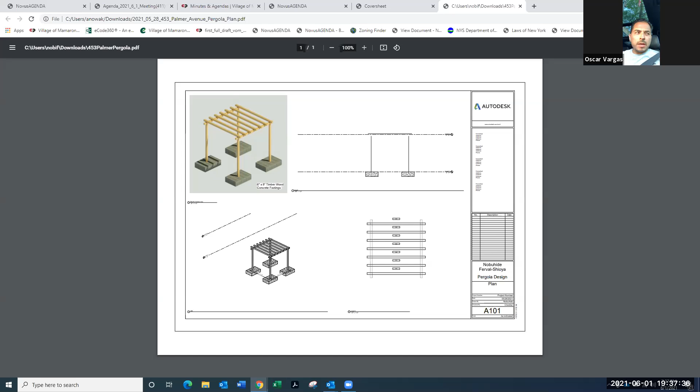Okay, so this is the pergola drawing. It's going to be a 12 by 12. It's going to be right at the entrance of the driveway. And it's a simple pergola. Maybe Oscar, you want to explain a little bit more? Yes, the pergola, as you can see, is very, very simple. All the posts are going to go 54 inches into the ground with concrete, by code. And that's how it's going to be sustaining. Now, if the customer later on wants to add columns around it, just for decorative, we can add stone veneer or anything like that.

All right, well, I have a few questions. First of all, there were two pictures that you included as well of pergolas. Are those just representative, or what are those pictures? It's pretty much the same as it's going to be. Amber, could you show those pictures? Because it doesn't.

Yeah, the pictures are examples of other work that Oscar did, so they are not identical to our pergola. I see. Yeah, okay. They're one example, close and far. Okay, well, the reason I like to point these out is because this is a normal pergola. This is how you build a pergola.

The other drawing you showed is just, you can't build a pergola that way. You can't just nail a piece on top of another piece. That doesn't work. You've got to have joints. Yeah, it was just that we couldn't really do it in the drawings, but that's how it's going to look. No, it's not. We wanted to know how you're going to build the pergola, and you can't build it that way. That's like a toy thing.

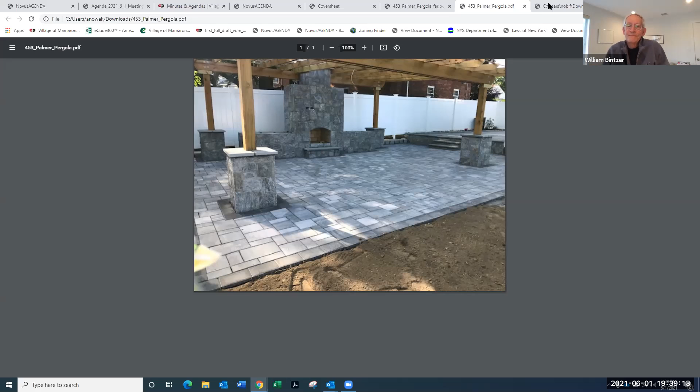I mean, you have to build it like this, with two pieces on either side or something like that to frame it across. How are you really building this pergola? Exactly how you see in the picture. I mean, it's just four posts, 12 by 12. Go back to that picture. And it's going to have two posts. Just go back to the drawing, Amber.

Because if you're telling me you're building it like that, I'm not going to approve it, because there's no way. Oh, no, that's not how it's going to be built. It's going to be built like in the pictures. It's just hard to present it to you guys. All right, so you said it was going to be built like the drawing. Now you're saying it's going to be built like the picture. What are we building here?

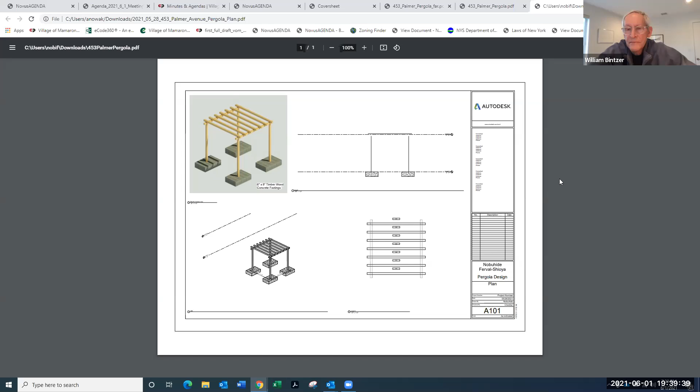It's going to be just like the pictures. It's going to have four posts, right? And it's going to go into the ground 54 inches, by code. And then, just like you see in the picture, we're going to cover the legs with stone veneer. But that doesn't show here either. So this doesn't mean anything. This is just a little diagram of something, a Tinker Toy thing.

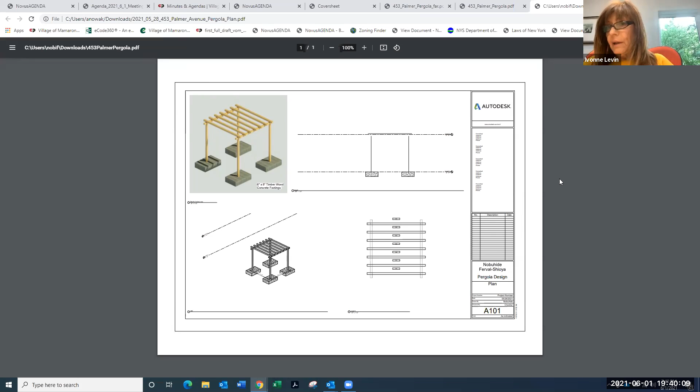Yeah, it's more like a diagram, I think, than an actual construction drawing. Yeah, it was more to show the scale, because the other drawing doesn't show the scale of the pergola. It's a much bigger pergola, the one that Oscar had. And that's why we did the additional drawing in the short amount of time we had. Mhm.

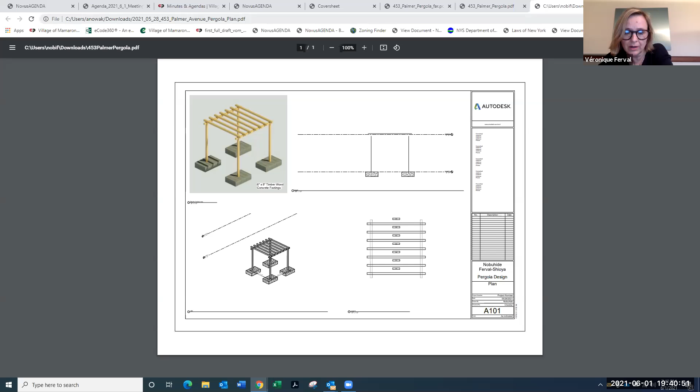Well, the other thing is, I think it would be interesting to see it, because you said it would be right at the foot of the driveway, right as you're entering the driveway, correct? No, it's sort of in the middle, I believe. Yeah, it's a little bit further down. So maybe Amber, would you mind just sharing the other drawing of the whole area? It's the one on, yes. So it's down, exactly. Thank you so much. So if you go up, it's here, exactly. If you make it bigger, you can see the small square.

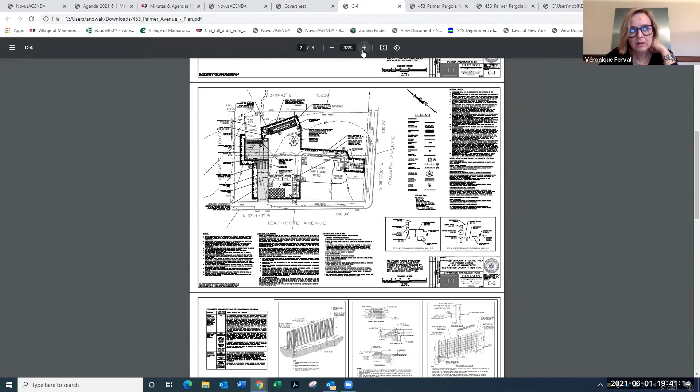So you can see when you enter the driveway, the pergola is between the larger space, that will be the sitting area, and the driveway, right here. All right. And there will be a tree on the corner just to bring a little bit more privacy, and that's it. I do think it would be helpful to see that actually rendered as part of the driveway and the area. Yeah, I would say I would want to see what you're going to build, not just an idea of what it looks like in a picture and an idea of the scale in the drawing. Nothing shows what you're really planning to build here.

No, I mean, it's a 12 by 12 pergola between a sitting area. Does it have stone at the bottom or does it not have stone at the bottom? Which way do the cross members go? I don't know which way they go. I guess they go across the driveway. How high are they above the driveway? 12 feet. Are they square at the end, or do they have ogees on the end? I don't know what it looks like.

I mean, with all due respect, I feel that you showed so many projects last meeting that were much bigger projects with much less level of detail, and it's such a big deal for a small pergola. I don't know that I would agree with that. Mostly they had architectural drawings of what they were building.

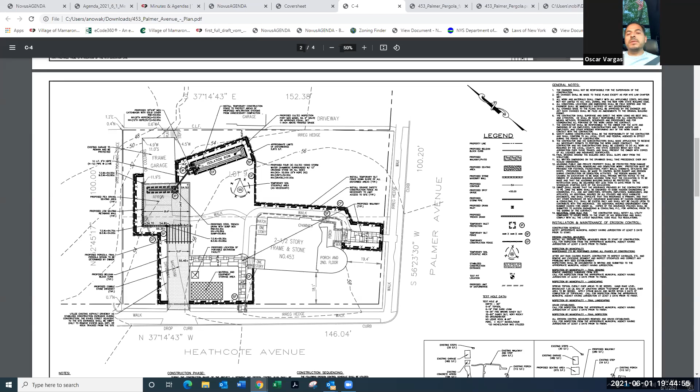The only thing, I'm sorry, with all the respect, if we can somehow help the homeowner, because we've been going on with this for almost 2 years. It's been very, very difficult for her. And I had to go back and forth with the building department. It was just... I imagine the building department would like to see a drawing of what you're going to build. Yeah, that's okay. They will need it.

I'll defer to the building department and Bill, but I'm not sure that you need a CAD drawing of it. But something sketchy, it could be a hand drawing, hand rendered, but with dimensions and showing which way the support beams go, and how it's going to be bolted together. Is there stone at the base, and if so, how high does it go and how big is it?

And so in a nutshell, you need us to hire an architect. No, I didn't say that. Nobody has said that. You keep saying that. I'm just saying a drawing. My contractor can't do a drawing and my engineer cannot do a drawing. So I need to hire an architect to do a 12 by 12 feet pergola on a project that's been lasting for 2 years.

It's unbelievable, how much money we're spending. Your engineer and your contractor can't do a drawing? Okay, so hire an architect. That's up to you, though. All right, so shall we vote? Sure. Motion? Anybody? A motion to have a vote. Yes, I'll make a motion to have a vote. Second. Okay, and I guess, roll call.

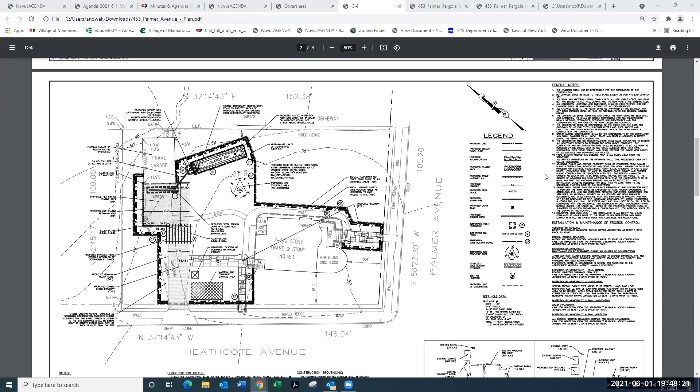Since it's under a certain amount, you can do this drawing yourself. We can give you some guidance. Minimal guidance, but guidance nonetheless. So Dennis Drogan is my name, find me on the website, and all my information is there. I'm sorry, can you repeat your name, please? Dennis Drogan. So I think you were copied on all the emails back and forth with Amber, but maybe I'm mistaken.

It could very well be. Okay. I also see that somebody has chatted who's come in who says he's part of the homeowner. I did say that if you want to participate in this, please come on as a panelist at the beginning and don't try to come on at the end. So I'm sorry you didn't respect that, but anyhow, we are where we are. So anyway, you understand what you need to do.

We need something that shows us what you're going to build there. That's all. I understand you have a lot of time to waste, but I will give you what you need. Pardon me? I didn't hear you. No, I understand you guys have a lot of time to waste, but I'll give you what you need. Well, that's very nice of you. Thank you. Appreciate it. Okay.

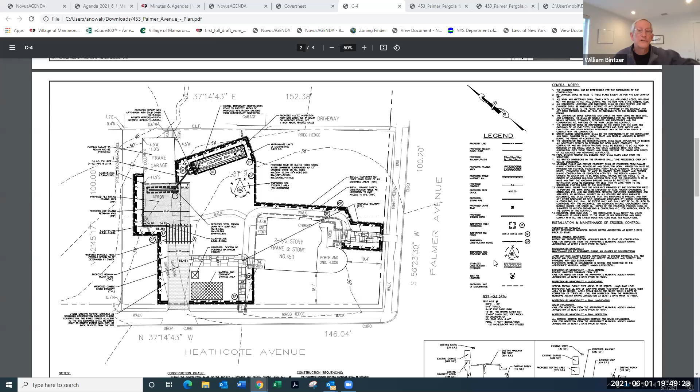All right. Sorry, we didn't ask for public comments here. Oh, I'm sorry. Would that have changed? Well, the applicant has a comment. Well, I did ask for any applicants to come on at the beginning. So if there's somebody who's raising their hand who wants to participate, that's fine. So it's the applicant for the next address. Oh, okay. I understand. Okay, so then we can listen to him if he wishes.

You want to speak, Michael? Yeah, I just want to say, I look at the CAD design that's there and I look at the plan. And as a licensed engineer with 20 years in design and construction, for me, everything that's structural is there. No, okay, Michael. Then describe to me how you build it. So you put this post in the ground. I will do that. No problem. So you pour the two foundations, you put the vertical elements up.

The next layer up is the cross members that go across. Which way? They go across the driveway. And do they have ogee ends or flat ends? Flat, cut straight. There's no ogees. The pictures they showed had ogees. Is there stone veneer on the base? No, there's no stone veneer. The contractor seemed to think there was. I would say if I were the applicant, can I build it exactly as shown in that drawing?

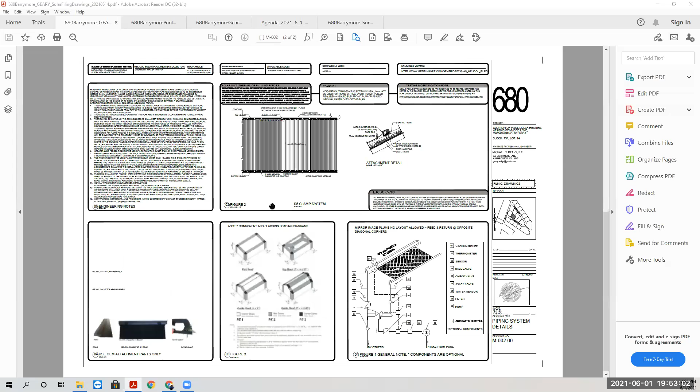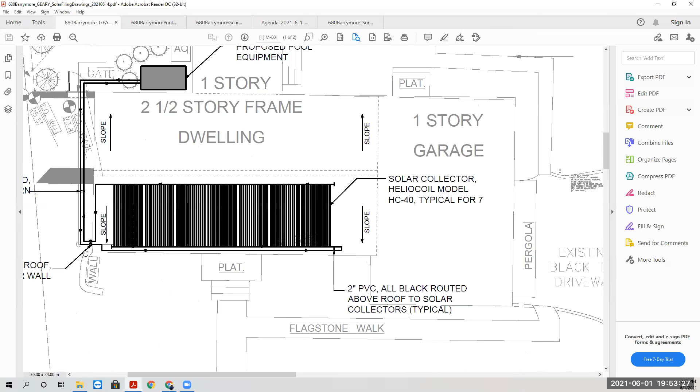Okay, so this is the plan. This is the application. This is a two-and-a-half-story house, and we're putting solar panels on the front. It's part of a pool project that's already been approved and is under construction. The piping will go underground. It'll go up the front left corner, hidden behind the existing leaders. That'll all be in white, matching the trim of the house. And then it'll go to these black panels on the roof.

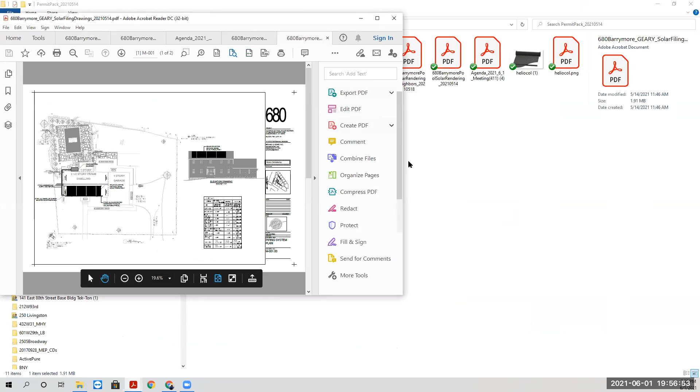Yeah, no, I was talking about both sides of the panels. Can you just expand that? Yeah, there you go. I mean, it's almost there. I was just wondering. Yeah, this will be centered. That drawing a little to the right, maybe. It looks like it's not quite centered. Yeah, the middle panel is not centered on the door. Yeah, that'll be centered.

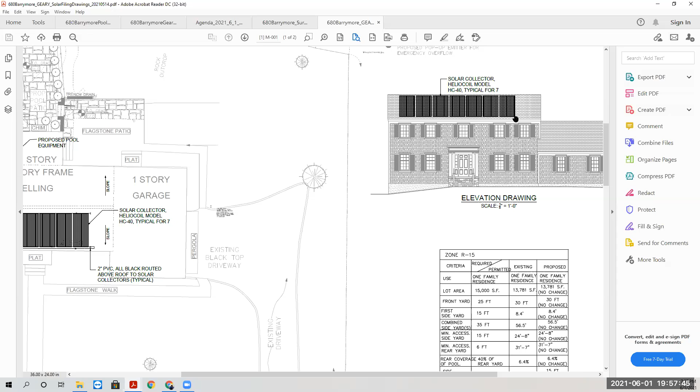Okay, because everything is so symmetrical that I think it will look better. The house is very symmetrical, and if there's not a reason to, it'd be better. No, that's just inadvertent. That's a CAD issue. Oh, okay. The rendering takes precedence; that's what they'll go off of. In fact, that's why we selected these panels; there were other alternatives in shapes and sizes, and we tried to keep it very simple. Like you said, not a huge deal, but it will look better for the homeowner for it to be centered too.

The house is very simple. I am the homeowner. It'll be centered. So I would encourage you to make it symmetrical. Can we just say as we make a motion to approve that we're approving it centered? Sure, I got no problem with that. Centered on the main roof. Of course. Okay. Anything else from the board? No. Anything from the audience?

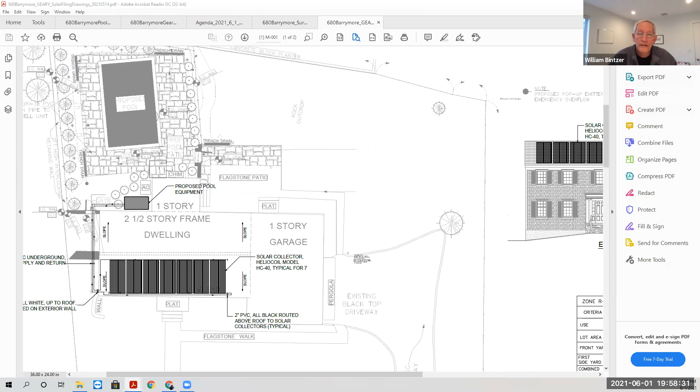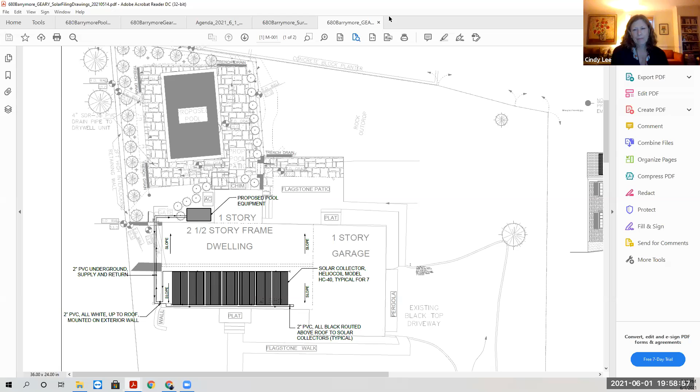I do not see anyone who wishes to speak. Okay. Then I motion. I second. Anybody opposed? No. Okay, very good. Thank you. Bye-bye.

I see that they're here, perhaps. I see the chat. So Andrew, sorry, are you a part of the application? I am the architect, yes. Hi, I got volume, but I have no picture. Can you hear me? We can hear you. I saw a message that the Rabinowitzes are here, but I don't. Okay, I think I got picture. Here we go. Okay, now I see it. We have you now, Randy. All right. There's a picture of Randy Rabinowitz.

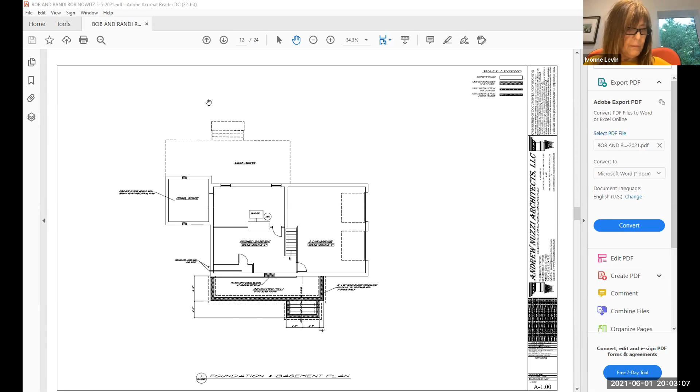This is the foundation plan. So we're going to come out 7 feet with the porch in front of the house. And we're going to be adding all new windows here. There's some brick we're going to take out. We're going to put new siding. On the second floor, we're going to take out the Romeo and Juliet balcony. We're going to put a large egress piece for the windows in.

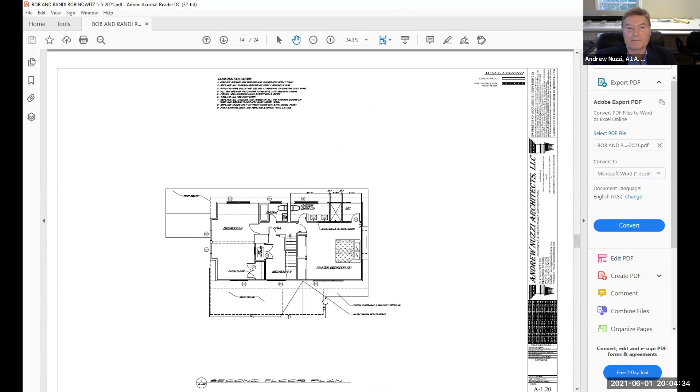That's just a structural section. And this is what the new look is gonna be. Let me zoom in a bit. All new Andersen 400 series windows. They're gonna be trimmed out with white PVC trim with 2-inch PVC sills. All new roofing and siding, new stone veneer on the foundation wall, new forward gable over the entrance, new doors, new Hardie plank siding.

We're gonna box out the rakes. We're gonna add a crown molding to it. We're gonna box out the rake along the main portion of the house. New windows, new PVC trim, rail system by Intex. We're gonna reflash the chimney, new siding, new doors. There's an existing wood deck in the back, which we're gonna repaint. Once again, we're gonna box out the rakes, both for the existing dormers and the main box. New trim.

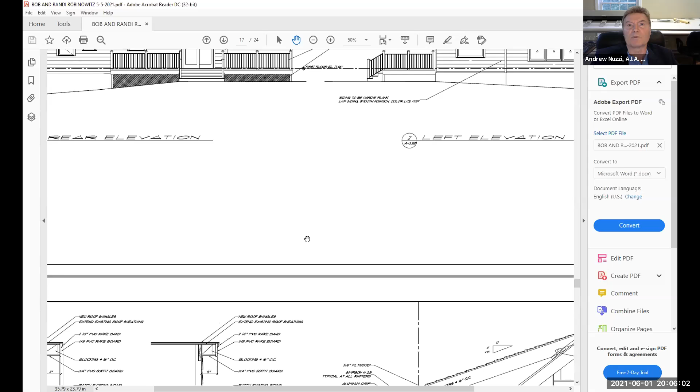And this is where we're going to extend that porch, and we're going to add the stone veneer alongside the front and the two sides. And I think you probably saw the stone sample that Randi and Bob are planning to use. We can put it back up if you like. Yeah, when you're finished, perhaps at the end, we'll just take a quick look. Yeah, and these are just the details of all the rake boards, the moldings that we're going to be doing.

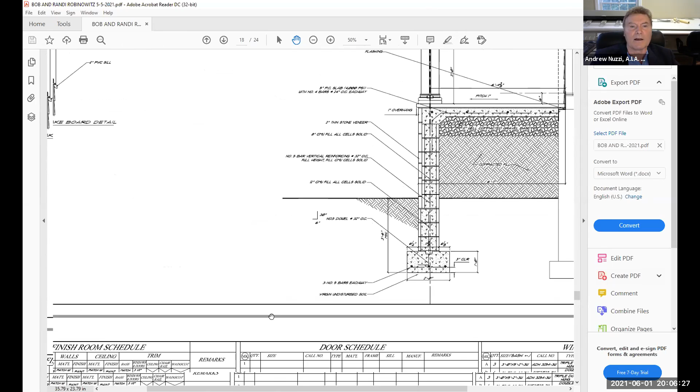You know, we're in the floodplain, so we're going to anchor and make sure it withstands the flood, the uplift and all that stuff with the steel. Window and door schedule specifying the Andersen windows. And that's really it. There's no addition or anything. It's basically just the porch along the front. Like I said, we're going to be stripping the house down to the plywood, all new siding, new roofing, new windows, new doors.

Okay. Questions? I have to say this is a desperate repair because we desperately need this after living here 30 years. Deferred maintenance. Well, the drawings look nice. Thank you. Good for you. Would you like to see the finished materials? Yes, I was wondering, is there a color elevation or just the materials to look at? Just materials.

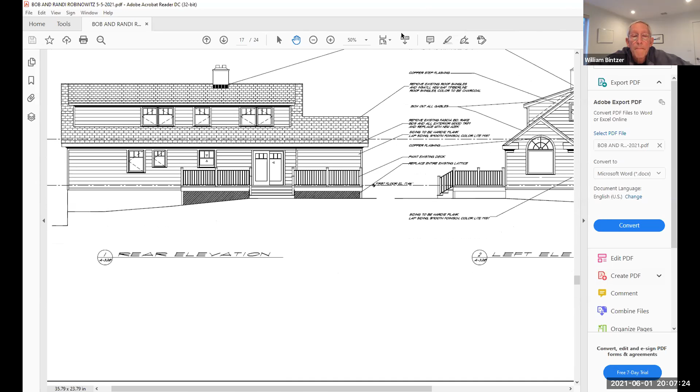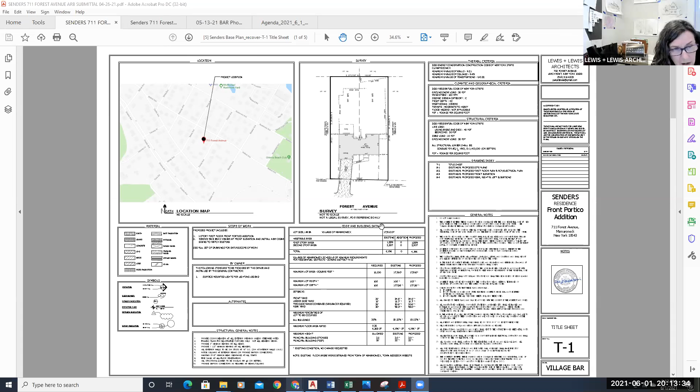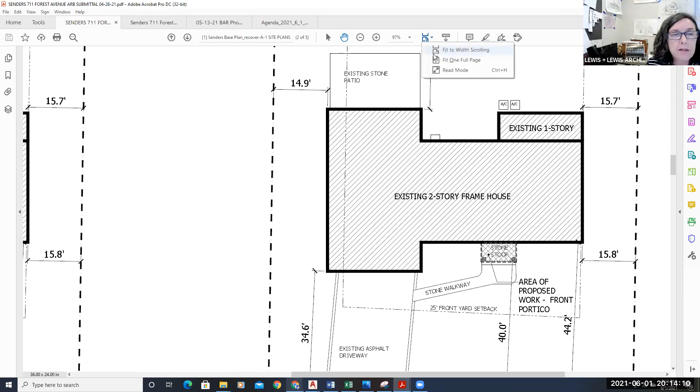So in terms of the site plan, the existing site is on the left, proposed is on the right. So really all we're doing is at the existing stone stoop. I'll zoom in. There's an existing wide platform and stoop at the front of the house, and we're just going to cover that with a new portico. So here's our new proposed. So the width is staying the same. It's a bluestone stoop. And let me jump to the floor plans and elevations. So fairly simple: two load-bearing columns. They have a deep stoop there now, so we're just going to cover that.

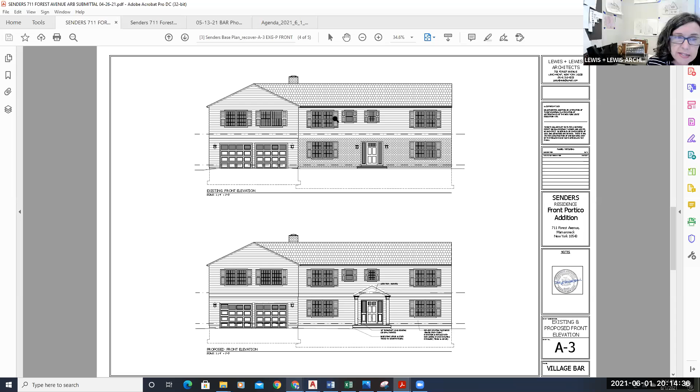And I'll jump to the elevation. So in terms of elevations, here's the existing front elevation. I'll zoom in. So standard colonial, we have a brick veneer front facade, dining room, eating area windows. And what we're proposing to do, here's the proposed, is remove the brick and add cedar siding to match the rest of the house. Here's our columns; the front door and side lights are existing. They replaced those a couple of years ago, so we're not changing that. We're just adding a gable roof, a cutout, and the columns with the asphalt shingle roof at the front. So that's the front elevation.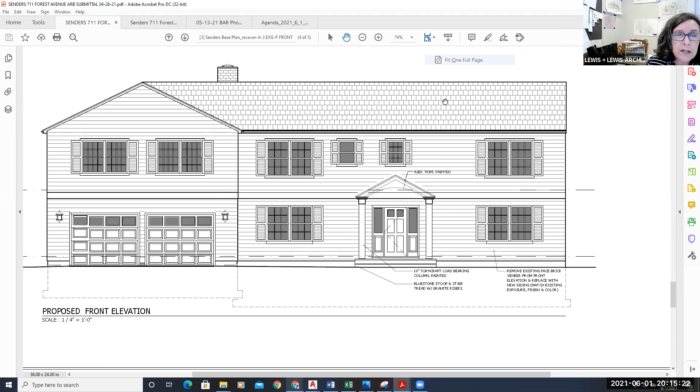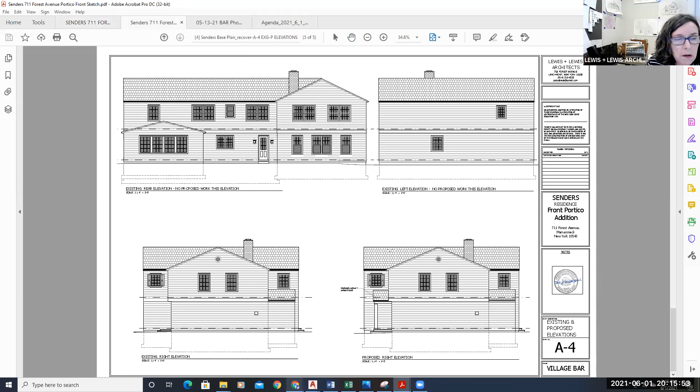I'll walk you through the side. At the rear, there's no change. So really it's the side you see, zoom in here. This is the right side, so you'd see the asphalt shingle roof and the side view of the column. And to help with that, I did a little sketch a while ago, showing Ben and his wife Jennifer what it could look like. So here's just a quick 3D sketch to give you an idea of what we're talking about. But the roof is not a metal roof, it'll be an asphalt shingle roof. And then to give you an idea of what it looks like now, this is the existing photograph.

And there's a side shot of it. And then the neighboring property. You're replacing the brick veneer with siding. Will that be still inset like that, or will? Yeah, so the second floor hangs out, you know, like 18 inches. You're just recovering. Okay. Yes.

And then, any questions? So it'll be all white, right? Correct. Kind of, yeah, like the rear facade. Yeah. Okay, good. And it's cedar painted. Cedar painted, just to match. I'll zoom back in. You know, we'll be matching. Okay. Trying to clean it up and keep it simple for you guys. Yeah. It's clear, pretty clear.

Thank you. All right. Any questions or comments from the board? Anybody in the audience wish to speak? Amber. I do not see anyone who wishes to speak. All right. May I have a motion to vote? A motion. Yeah, and I'll second that. Okay. Anybody opposed or abstaining? Nope. Okay. Very good then. Then you're good to go.

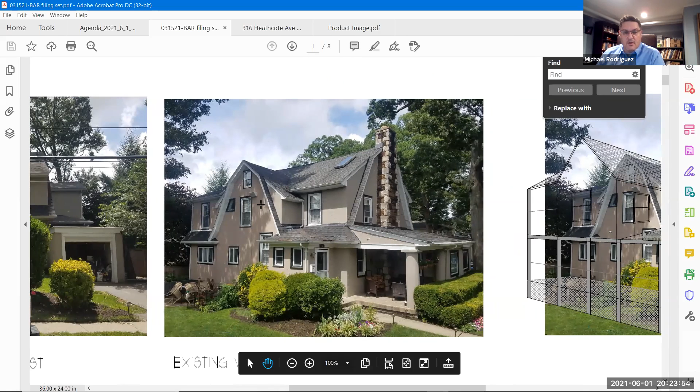Here is the facade that will have most of the exterior work done on it. As you can see, there's already a wing, if you will, coming off, set lower than the main roof. What's proposed, and this is just to give some sort of three-dimensionality to it, is we'd come off from that existing wing an additional 10 feet.

What that does, it gives us a master suite upstairs, no change to quantity of bathrooms or quantity of bedrooms. It would just make this back bedroom our master suite. It'll give us now a nice wraparound L-shaped porch, I should say. And then we'll cover that, extend the front. It would also afford us to have a covered entry instead of a non-covered entry.

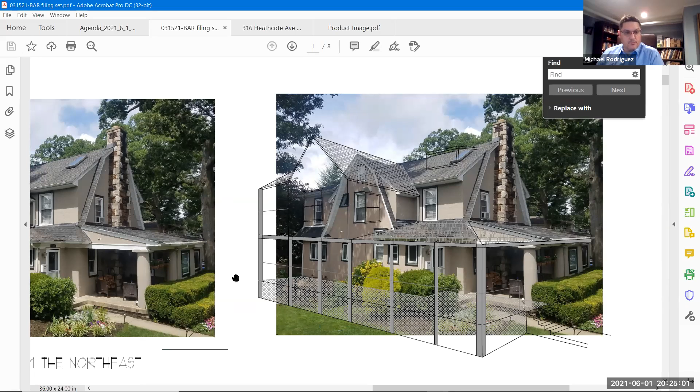As you can see, the existing porch, at some point prior to us buying it, half of it was enclosed for a front room of, I think maybe they had an additional bedroom there. At some point we used it for a TV room, not important. But as I zoom out here, you can see the site plan.

And again, the primary areas of work would be this west side, and then this new entrance off the driveway, the existing driveway, into the basement. I actually have a window here. The opening is more than 36 inches, so I'd be able to put in a 36-inch door getting to the basement. It would also give us a direct line in to bring furniture in, which would help not have to take our furniture apart to actually get it into the basement.

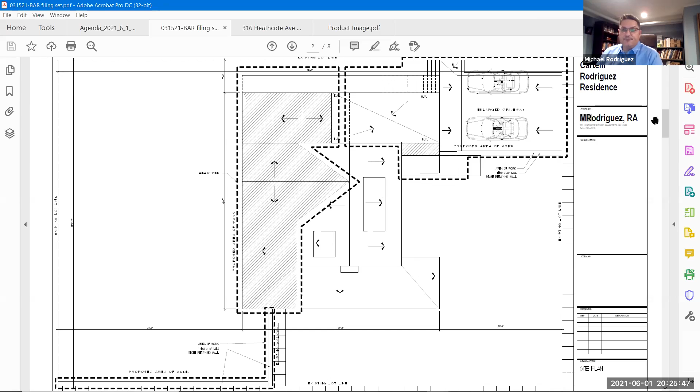I'll scroll down here too. So we'll be doing some new floors, but the kitchen ostensibly stays the same. This is the porch I was referencing previously. So on the first floor, it's primarily just this porch that goes around. And then here, I'll zoom in. The master suite here in the back, little porch, bedroom, and then the bathroom. The existing bathroom is in this area right now currently, and we would just shift the plumbing over and create a walk-in closet.

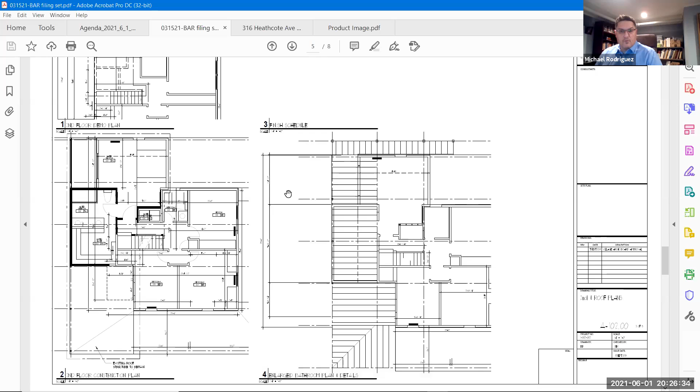Elevation wise, this is what the elevation is proposed to look like here on that east side. We would obviously have stairs coming out and going into the backyard. This was just to show the board what we were proposing. So asphalt shingles for the roofing, and then the Hardie plank simulated shingle we would use on the wing coming out, and then the Hardie plank on the preponderance of the facade. Keeping with the same aesthetic, we would use the Doric column to go around, and then we'll use some vertical siding here to cover up the underside of the deck.

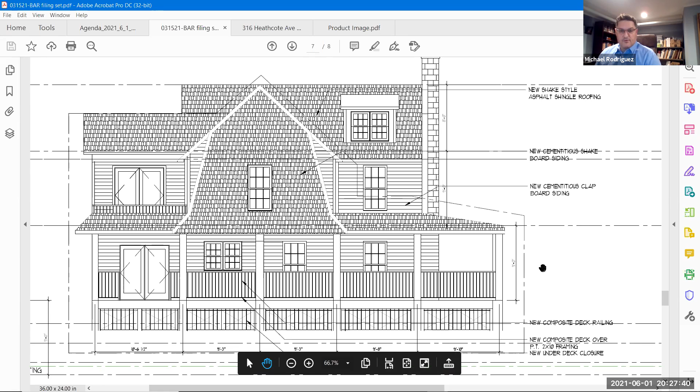Okay. This would be the south side. This is right on the lot line to the neighbor next door, so that's not viewable from the street facade. Our two preponderant street facades would be this upper one here, which is the west, and this one here, which would be the north side, and our entry off of Heathcote.

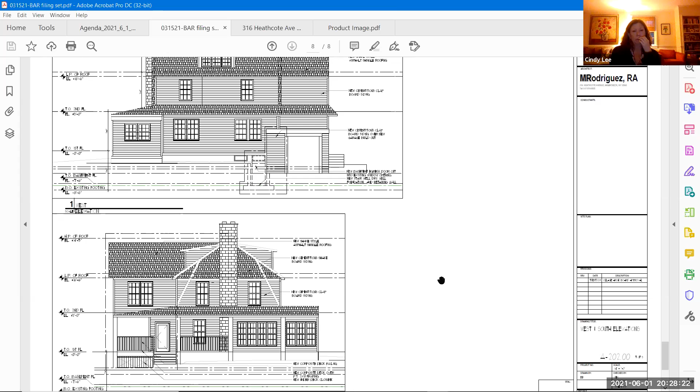So we'll go to pictures right now. This is what I had submitted. As you can see, we would propose to change just an amalgamation of different size windows, types of windows. We're just trying to collect it all together and kind of beautify. Definitely. One question there, since you have the picture. That facade is going to grow like 10 feet out, right? Are you kind of extruding the whole thing, the gable with the barn type? That's correct, but it's just this upper part here. The first floor would be a continuation.

As you can see in the front, we have a small covered porch, right? So that would just now be an L and would come across that north facade and then down the east facade. So that lower section does not get expanded whatsoever. Yeah, okay, the top. Just the top, yes, ma'am. Okay, but I didn't know if you had taken all of those elements out to the final facade. The small gables on the east side are being extended as well? Are being maintained, yes. Okay, because it wasn't very clear by looking at, okay, that's the roof. All right, thank you.

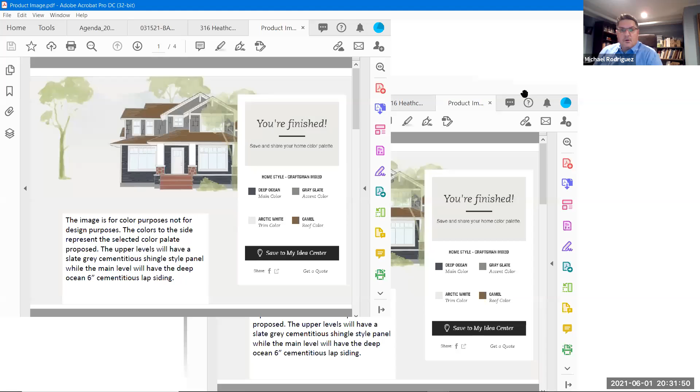All right, so we've seen these already. This is across the street as you look from our property north. And that's the other photo. And sorry, I'm just trying to get to this document here. Just for coloration and to help, because I was having a hard time getting samples of the Hardie plank for color, these are some of the colors that we are proposing to utilize.

The roof line would probably not be this color, but we're looking at doing a two-tone, so a lower and an upper. The gray being the simulated shake panels from James Hardie, and then the darker color on the base of the house on the first floor. And then the trim would be a PVC trim around the house as well. Currently, all the trim was redone, and it's all bent-up aluminum. It's pretty horrible, and so we obviously want to replace that with something that's more sturdy.

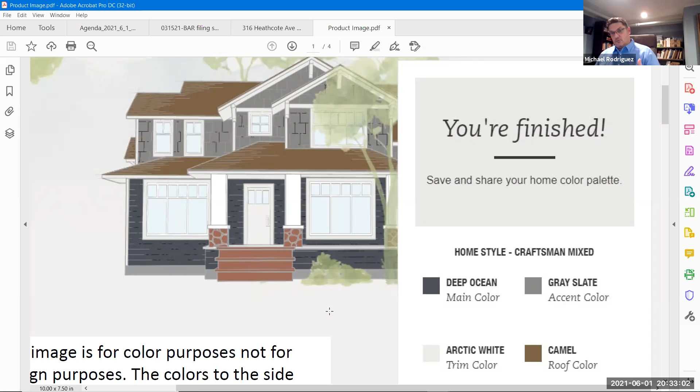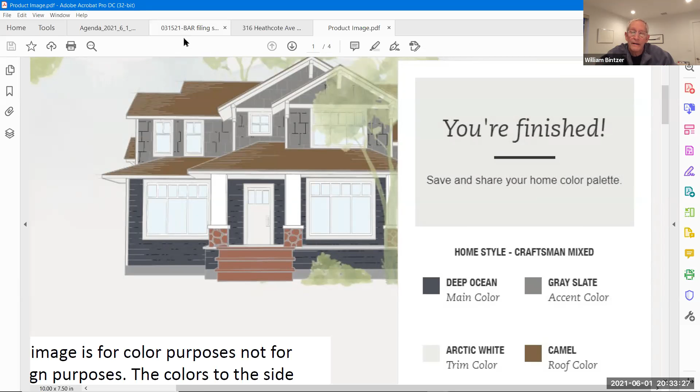And in addition, when the stucco was painted, at some point they removed whatever trim was there around the windows, and the trim is actually just painted on right now. So again, we'd like to put in real trim upon the replacement of the siding and the windows. That's interesting. If you're done with this, could you flip back, now that we see what you're planning with the colors, to the Stanley Street elevation? Which is the elevation that most people will see, I suppose. They would see this one and this one.

Yeah, those two. Okay, so the top part's gray, the bottom part's dark gray, the roof's to be determined. Okay. And likewise there. And that's all getting new windows, that playroom or TV room? Yes. We want to widen them up; right now the aesthetic is just all over the place. They're picture windows. Sure. It looks nice, those new windows. And with regard to the roof, if you're not using that color, what color are you thinking of? What type of color?

I would probably extract a brown. That, to me, seems a little bit too reddish. I would probably, as we zoom in here, pick out something a little bit more brown, like this, and match it with tones of the natural. A little darker. Yeah. Okay. So not an overall dark house? Not at all. We like a very light house. But for the roof, I think we'd probably go with something darker.

Okay. It's a great chimney. Yeah, it really is. It makes the house. It's a beautiful chimney. Okay, so keep the chimney. Absolutely. Are there any other questions or comments from the board members?

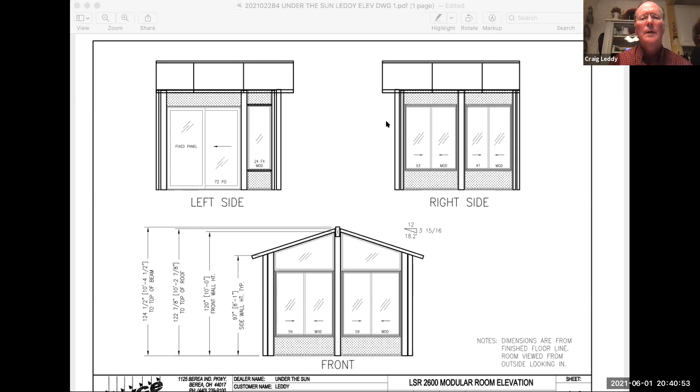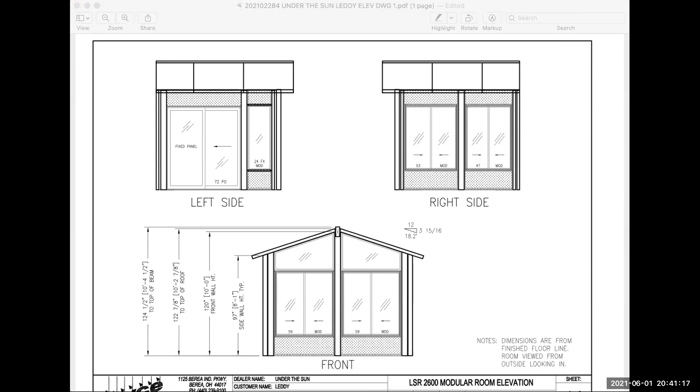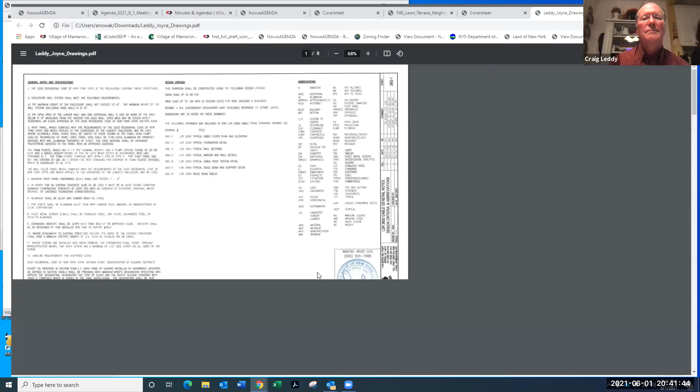And now you should be seeing a little bit more of the plan itself. No, we're not seeing a plan, just the elevations. Mhm. Let me see if I can do that. I'm just gonna share the documents that you've provided on file. Okay, thank you. So if you could give me some guidance as to where. Yeah, actually, if you go back to that first one, I think that was good.

Yes, that's right. Jim, do you want to speak to any of this? Sure. Can you hear me? Yes, we can. Good evening, everyone. I just want to clarify, I'm the owner of Under the Sun Improvements, and what you're looking at are stamped engineering plans from the factory. And then we also have stamped engineering plans for the new platform that are from a local engineer. So this is a prefab sort of a sunroom then? Yes, sir.

It's a vinyl product with a lot of movable glass, like Mr. Leddy was saying. It's designed to let a lot of light in. It's low E glass. It's vinyl on the outside. It's white, so that goes with the decor of his home and Margaret's home. If you go to the other drawings, you'll see where we're putting it with the new base. But this is exactly what it looks like, and it will be white. We'll match the shingles also. It'll have 2 gutters, 2 downspouts.

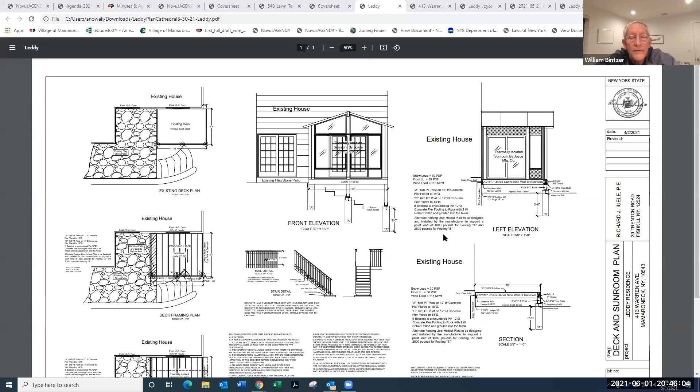Well, it's not perfect, but it's better. Let me see if I can share that. It shows a kind of yellow colored thing. See if you have a little better luck here. I think I've got the cathedral. Oh, am I not sharing anymore? Sorry. Greg is sharing now. Now you're sharing. Okay, there. That's it. There we go. I think that's the one you were talking about. Yes, thank you.

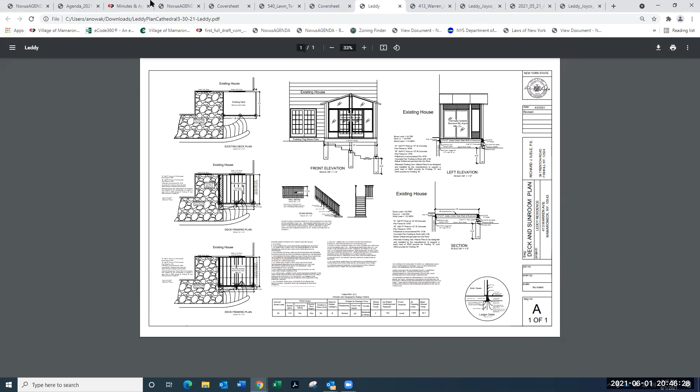So this is what is going on, right? This is the one being built, and that is to scale. Yep, that's exactly what's going on right there. Can you expand that a little bit? It's matching the first plans that Mr. Layton showed. There you go. Thank you very much. So that's going to be a new deck. And other than that, it's the same footprint. It's 12 foot wide. It's a 10-foot projection. Okay. So the other elevation, what does it look like?

It's 10 foot. We see the front, we see the left, and the right is going to be just glass. Yes. So it's almost like a greenhouse, except it's got a solid roof. It's much cooler than a greenhouse. Well, I'm just saying it looks like it's all glass other than the roof. Pretty much. I mean, there's no solid walls, right? There's no opaque walls. No, it's all glass. Got it.

There is a knee wall along the bottom. I see. Only on the side, not the front though. The front is glass. And on the sides, it looks like there's sort of a spandrel across the top too. Yeah, okay. I'll give you that. So the front is all glass. Yes. The cathedral kind of deal you were talking about.

So the other one, the one where you exit, where you have the sliding doors, is the wall metal? No, the whole room is vinyl on the outside. It's aluminum sleeves on the inside. Okay. The vinyl is on the outside for low maintenance. And yes, there is a kick plate on the bottom. That bottom portion, when you're looking at it, is a solid piece at the bottom.

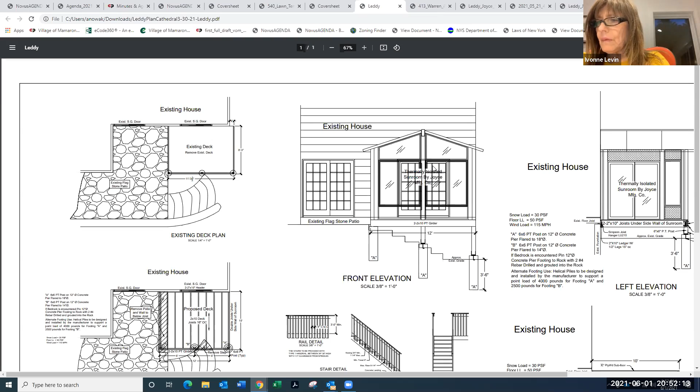Maybe it'd be helpful to look at a survey or a site plan or something, just to kind of orient where we are on the whole house. Agree. Let's see if she has that. Otherwise we can try it. It's small. Can we zoom in a little? Okay, so all this is happening in the back. It's in the back of the house. Correct.

Yeah, and there's a slate patio that's been there for quite a while. And it comes off of what we call our TV room. So that's a nice look flowing from that into the sunroom. Okay. Let's see, are there any other questions from the board?

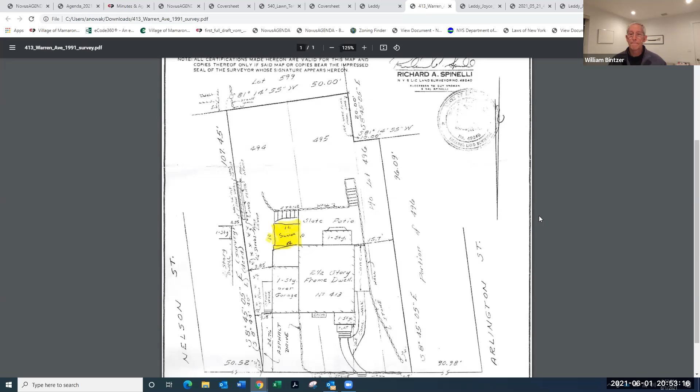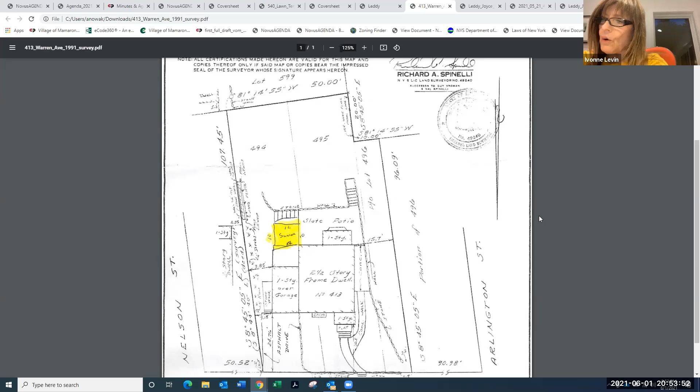Just one question. Those railings shown in the drawings, where are those going? On the existing stairs, or? I saw some railings. I didn't know where they were. Yeah, those aren't part of this. They are not? No, there will be no new railings. There's no need to have a railing there. I think they were thinking that they might be rebuilding that, but we're sticking with the original stone steps.

Could we go back to the first image you showed, the photo that shows the house, the existing conditions? Yeah, the photos of the house that we started with. I think you might be referring to what the applicant showed. I don't know if we have that. Hold on, let me see. I sent those over to Amber a while ago. And there was another one, the deck one, the first one you showed. Well, that'll probably do it. There you go.

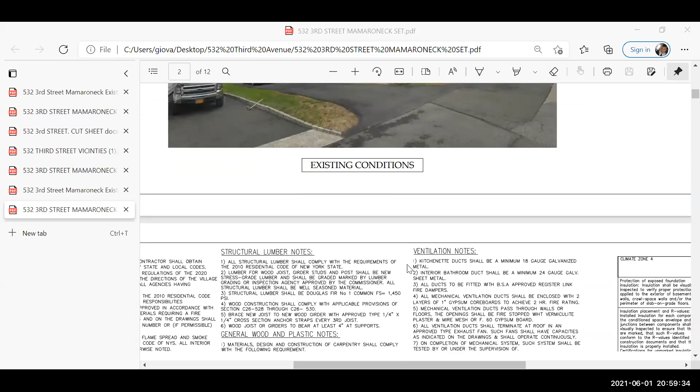The proposal doesn't include any changes on the front, which is the most important part of the street level. And the extension, I'm going to show you on the floor plans. So the first drawing shows the existing conditions of this property. This is the existing, and in the back there is a rear garage, and this is the proposed extension. So basically, the proposal is in the rear yard and in the side yard, in order to accommodate circulation inside the house to connect first floor and basement.

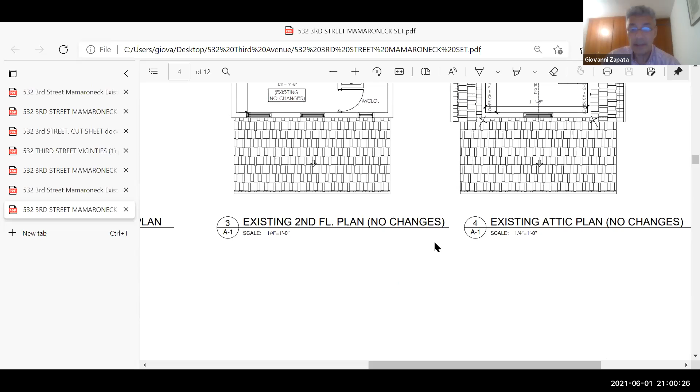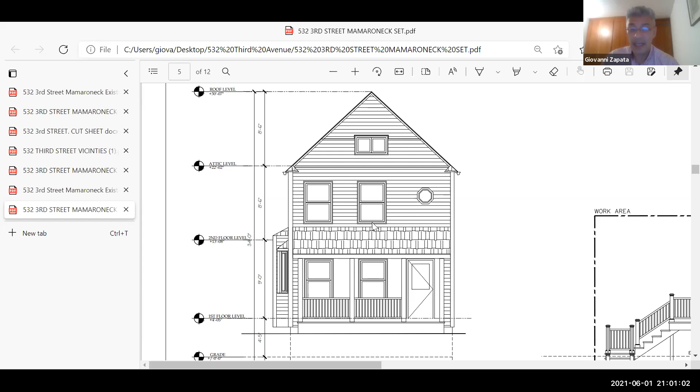This is the existing condition. It's a small house, as you see, and the deck in the back. This is the second floor. Let me show you the first floor. The first floor has in the back a laundry area and the dining area and the kitchen in the middle. And in the basement, we have an existing open space playroom. Second floor remains as is, and this is the main elevation. As you see, it's a new colonial style with very plain finishes like vinyl siding, vinyl windows, and shingle roof.

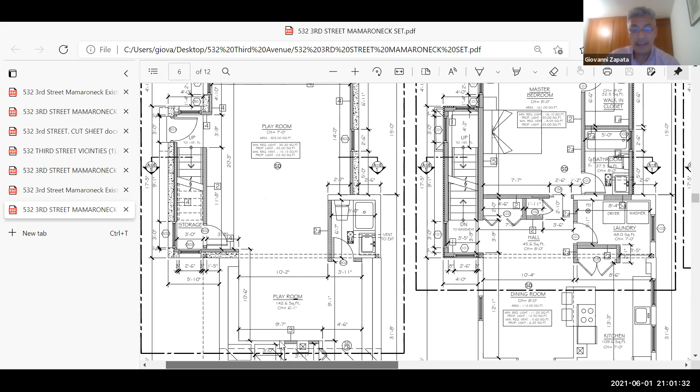And this is the back of the house with the deck and the circulation to go to the back. And this is one of the side elevations showing the existing extension and the existing deck. And this is the proposal. This is the first floor, the existing house. We are going to keep the kitchen in the middle, and the extension consists of a new master bedroom for my clients, with a walk-in closet, full bathroom, and the circulation and the staircase going down to the basement and going out to the patio or garage or the driveway.

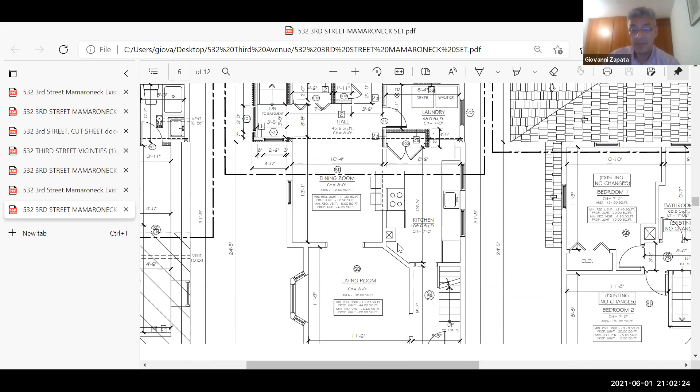The dining area is going to be extended, in order to accommodate a coat closet, linen closet, and reconfigure the laundry area and make an open space from the kitchen to the dining area in order to make the space bigger. Basically, this is the side elevation. As you see, the idea is to have a continuation of the existing style of the house from the basement to the first floor, using the same type of materials, vinyl, Andersen windows, and a gable roof with asphalt shingles to match the existing. There are existing solar panels that are going to remain.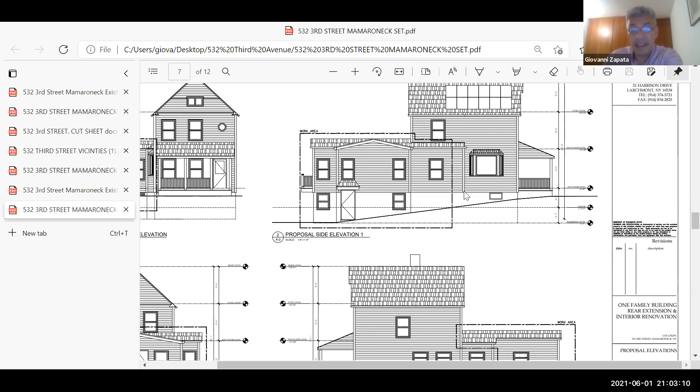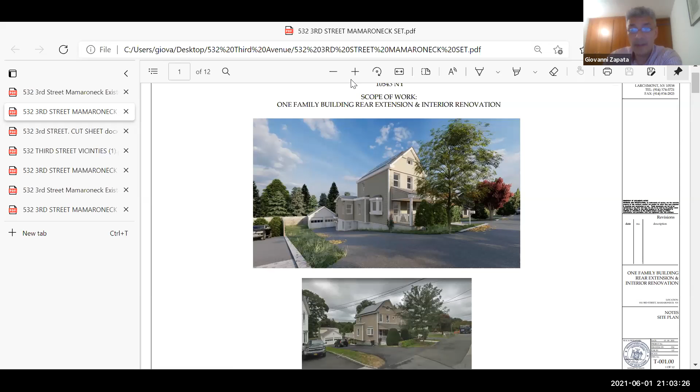Okay, so let me show you. This is one of the new images that we are going to have at the house. As I mentioned before, the objective is to try to keep the same style of the house in the extension, using the same base in a stucco finish, and the extension is going to be done in vinyl siding to match the existing one, and the roof is going to be asphalt shingles, as shown in the rendering. Excuse me, just a quick question. So this is a rendering showing the proposed addition on the back, right? Yes, exactly.

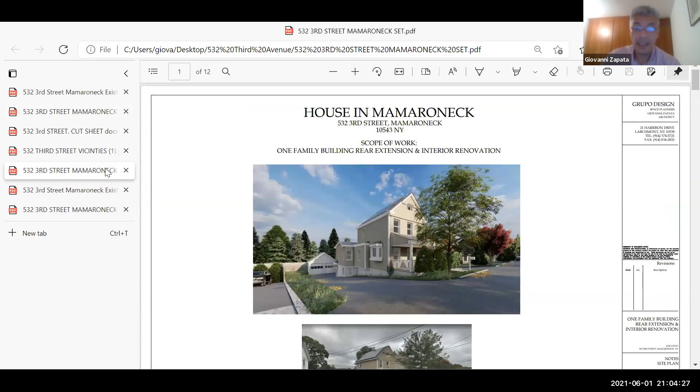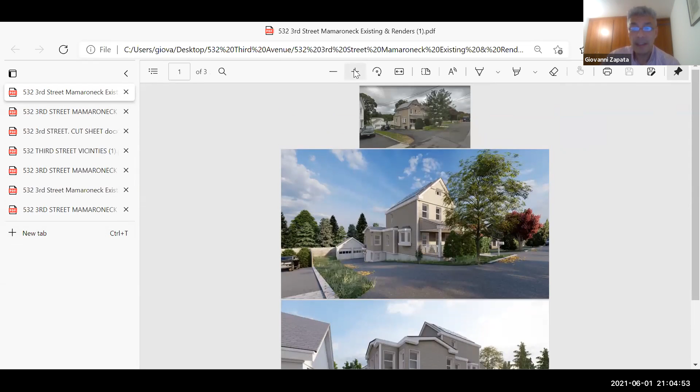So as I mentioned before, the idea is to try to match the existing style and the existing new colonial building, extending the back. This is the existing house. As you see, vinyl, the shingled roof, and the stucco. So we are going to finish this area. Okay, this is the rendering I have. This is the existing house, and this is the rendering that you see in the presentation on the set of drawings, showing the materials, and this is the other view.

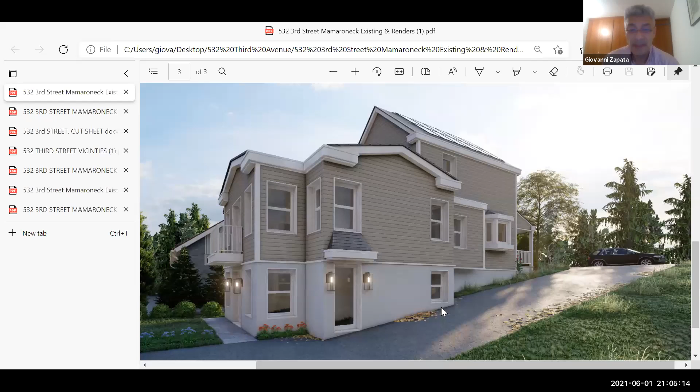This is the other view. So, as I mentioned before, because of the pitch, we are going to try to keep a stucco in the basement. That is going to be like an on-ground basement for the family room downstairs, and this is going to be the master bedroom with a little balcony, and we are adding a little porch to emphasize the entrance to going up to the first floor or to stay on the basement.

As I mentioned before, I'm going to use the same material, vinyl in the siding, shingle roof on the top, and all trim is going to be PVC, and we are going to use gutters and spouts in white color in order to try to simulate the existing house. Let me show you the materials. So the 5 inch vinyl clapboard, asphalt shingles to match existing, Andersen 400 series windows, and PVC trim.

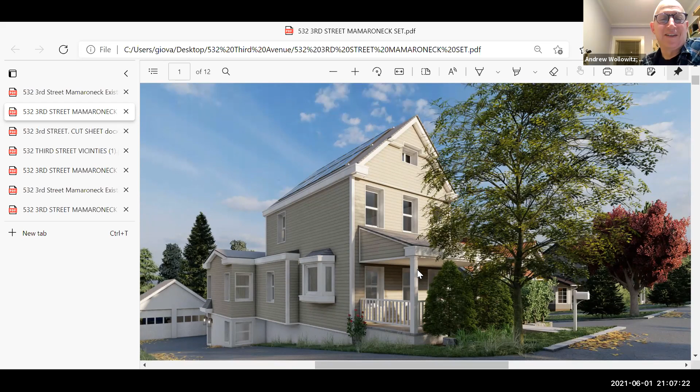I think that's all. I don't know if you have questions. Can you go back to that page with the proposed sketch? Sketch, I know. It almost looks pretty, almost CGI. That is the best rendering we have seen. I thought they had built it already. Yeah, the building is already there. I was confused when I looked at that on the web before the meeting too. I'm glad it wasn't just me.

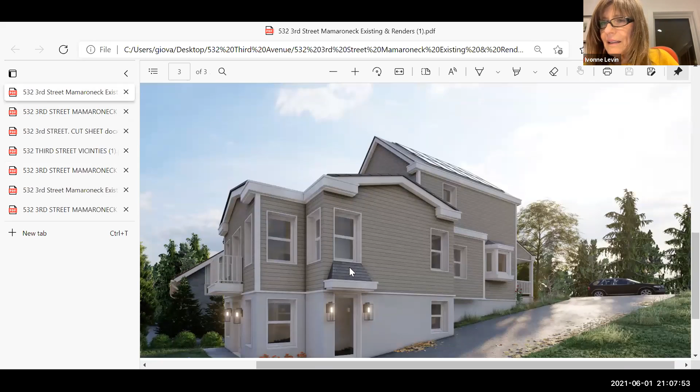If I had one comment, I would say that whoever parks on the right side of the garage will have to be very careful backing out. The car, yes. But we have a lot of room. Can you show the other view of this rendering from the garage? Yeah.

I just have a little question. This is just pure aesthetics, and I'm thinking about the detail on the corners. I understand that you're trying to mimic the detail in the main house. I see that quite deep detail, and I just wonder, it looks a little heavy on the corners. I was wondering if it had to be that wide. So it's just an aesthetic question.

Yeah, I think the rendering shows a very heavy trim on the corner, but I would say that it's just the view of the rendering. The idea is to use as much as 3 inch trim, because we don't want it to look like a column or a very heavy exterior corner. It's just to put the corner together with the two materials. Yes, you're right. It looks very heavy, but it's not really. It's just the rendering. Like you see on these corners, they are less. Yeah, it looks better in the house.

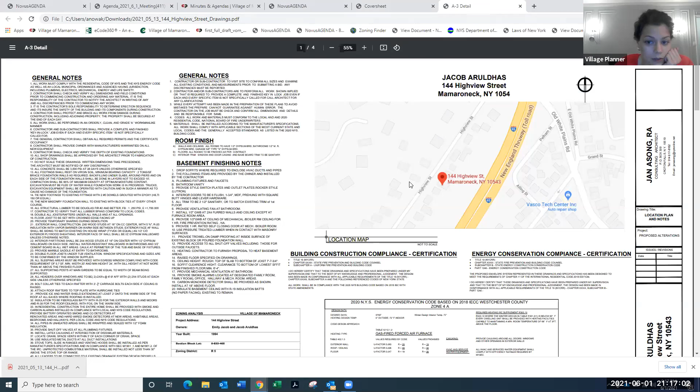Do you have drawings to share? Yes, I do. I don't think I can pull up my drawings. No, I cannot pull up. There seems to be a glitch with how she signed on. Amber, do you think you could bail her out with the drawings? Yes. Amber will share the drawings for you. Oh, good. Okay, thank you. You just won't be able to point with your cursor. You'll have to direct her. Okay, one moment, please. When I click on the attachment, it just comes up as a blank screen. Oh, there we go. This is Amber doing it, though. So tell her what to click on. Could you scroll down to the next page? Can you see us? No, I cannot see any of you anymore. Are you sure you don't have just a document open? You should look at Zoom. When you're in Zoom, do you see us? Yes, I see you. Great. So I'm going to share my screen again. Here's the drawing set that we have open. Can you direct me to what documents? Yes, let's go to page 1.

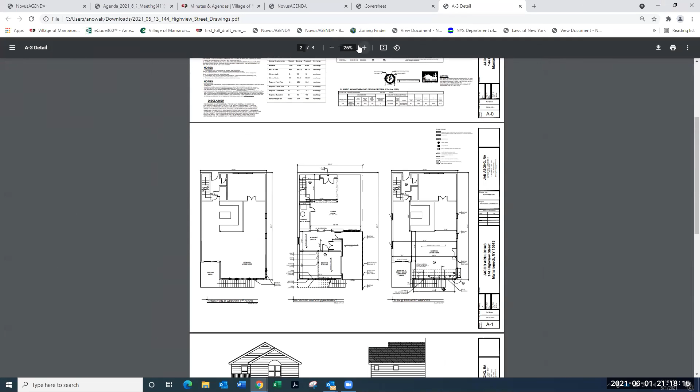Okay, so if you look at the floor plan of page 1, well, let me just summarize what we're doing first. We are replacing a window that he has on the east wall of his open plan living space, which includes his living room, dining room, kitchen, and a small study. And all that is open plan looking out east across the rear of his property and across Interstate 95. And that window is approximately 11 feet long. It is a picture window with double hung flankers on each side of it. It is about 5 feet high and 15 inches off the floor.

And he wants to expand his view, which is quite a distant view, very lovely, across the entire wall, which we have succeeded in doing. If you look at the floor plan, it's at the bottom of the floor plan, actually. And you'll see the 4 posts and the 4 stationary windows across that eastern wall. Those new windows that we're installing there are going to be 4'5" wide and 6 feet high with a 12-inch sill height, expanding his view tremendously.

And we're proposing to replace a window around the corner from that on the north wall, which would match in height the 4 picture windows facing east. So we're proposing to do that. And then what the owner, Jacob, would like to do is take that existing window that we're removing from that wall and install it in his garage workshop, which is above grade, but in the basement level.

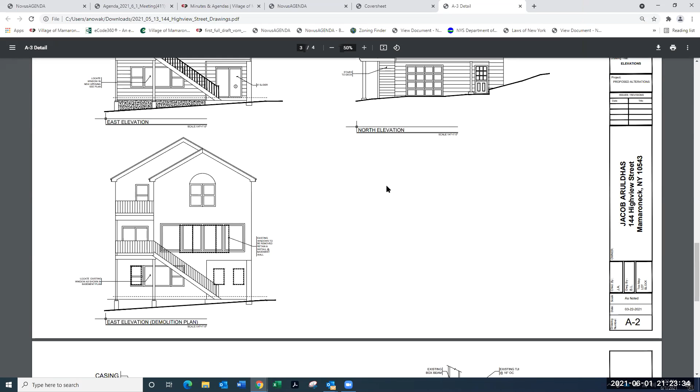Okay. So this is all on the rear of the house. Actually, that north elevation, can you just show that? Can you just slide up? Yes, the north elevation. Because that has the other new window, right? Yes, that has the corner. Amber, can you scroll up a little bit or scroll down? Right there, exactly. There's the double leaf casement window, and that window matches in height the new stationary windows on the east wall. Understood. So that when you walk into the room from the inside, it gives that wraparound look at the corner.

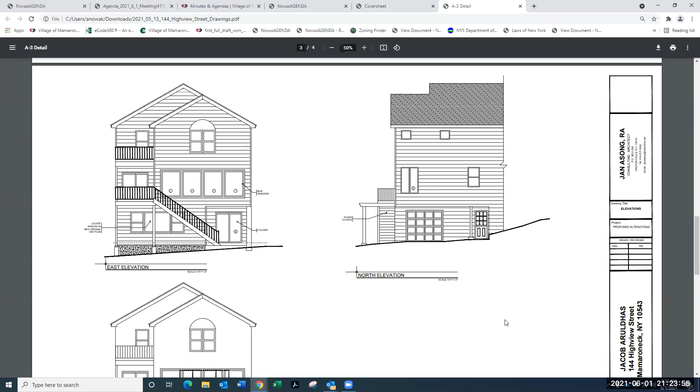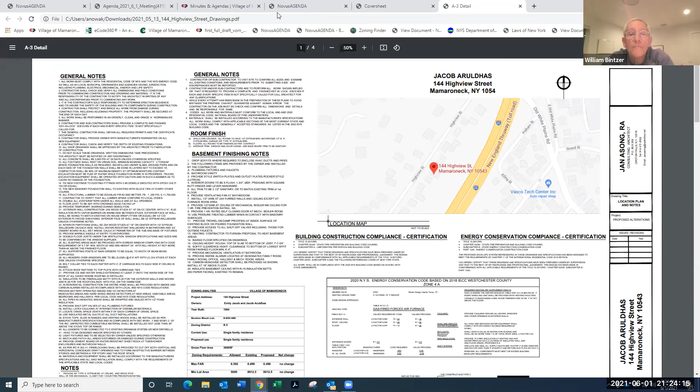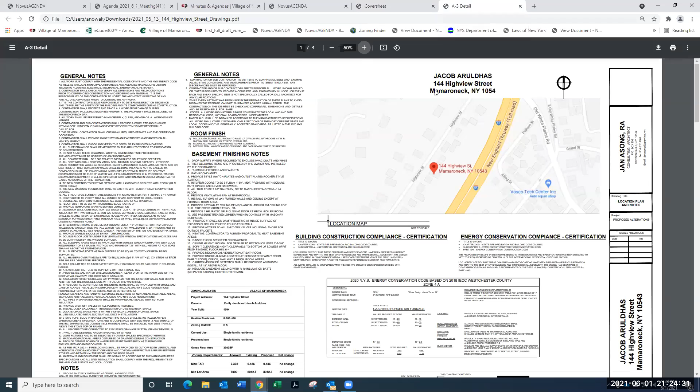It's very beautiful. Maybe could you click up then to the site plan for a sec, just so we can get oriented where everything is here? Oh, yeah, okay. The site plan, I think, is further up. Site plan is one of the documents. Yeah, I can't click on it. One second. It was included with our application, but we didn't do a site plan for the work that we're doing because there was no exterior work to the footprint. I was just trying to get oriented where this house is in the world. Oh, there's a neighborhood plan there, on the first page.